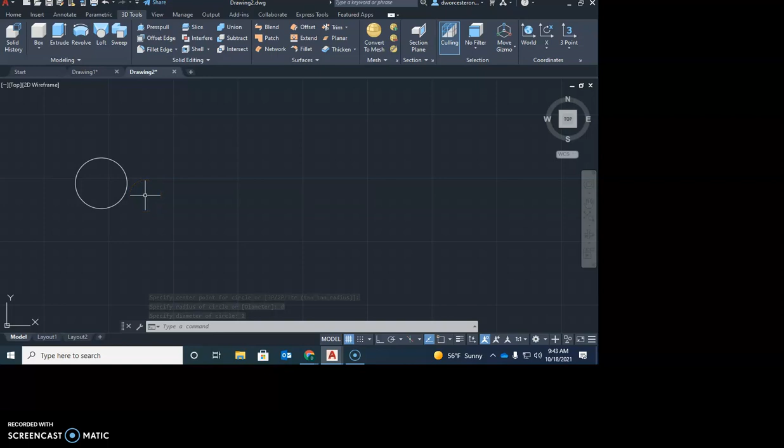Beside that circle, I'm going to use the line command and draw a set of lines that looks like a W.

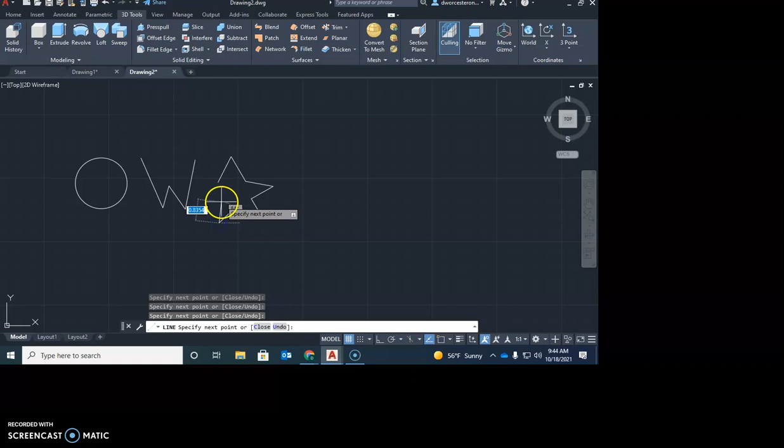Next, beside these, we're going to draw a star shape. I don't want it to be a perfect star, so don't take a lot of time on it. Try to make it approximately the same size as our W and our circle. Make sure our O-snap is on at the end so it snaps back to the beginning or end of that other line.

If like mine, yours is a little bit large - notice mine is quite a bit taller than my W and my circle - so I'm going to scale mine down a little bit.

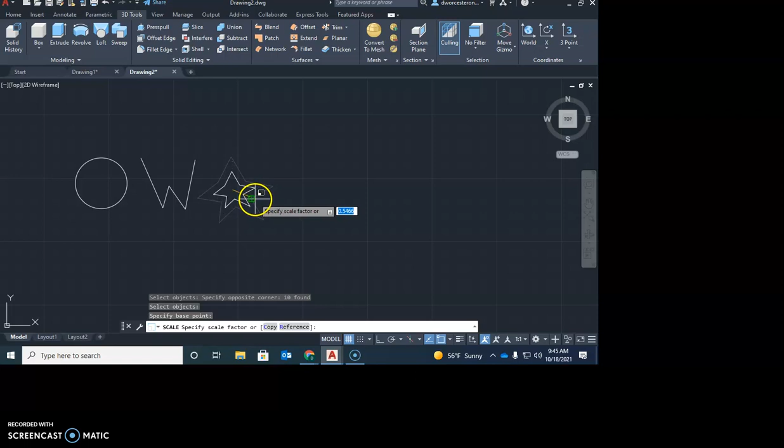I'm going to go SC for scale, select it, pick the middle of it for the base point, and pull it out here to make it a little smaller. I keep snapping to other points here - come on, work with me. About there, and then move that up into place a little bit so it's a more appropriate size.

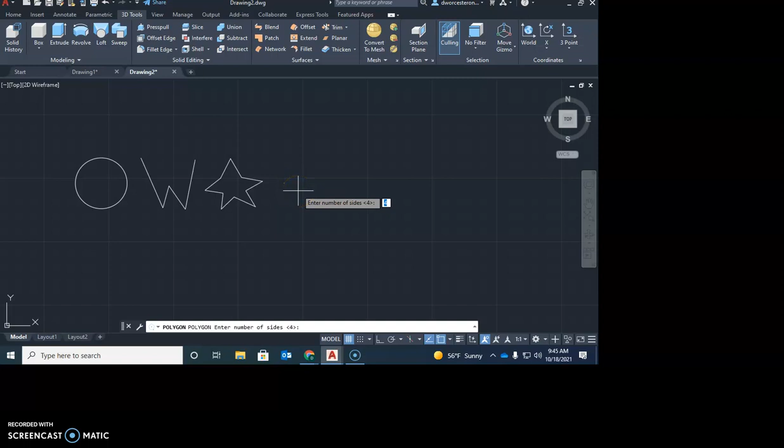Next, we're going to draw a polygon - POL for polygon. We're going to draw a 5-sided polygon, so a pentagon. I'll pick my start point; it doesn't matter whether it's inscribed or circumscribed. Again, just try to make it approximately the same size as our other objects.

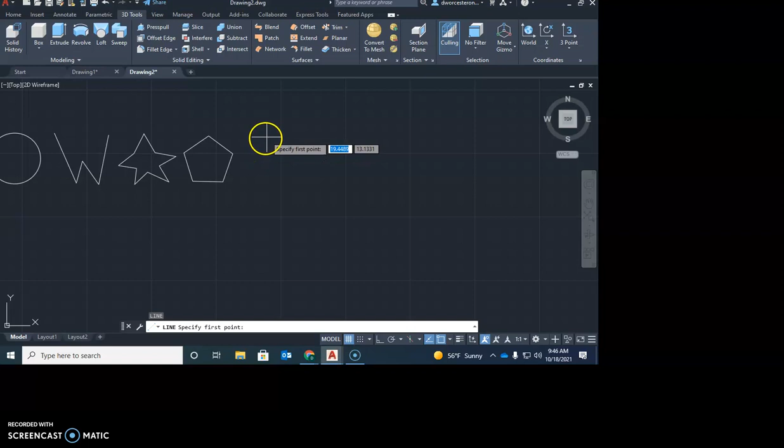Next, we're going to use the line command once again to draw a diamond-ish shape. Here's the important part on the diamond: I do not want those ends to meet, I want that to be left open. So draw the diamond shape, but leave the end of it open.

Last shape - I'm going to come down here at the bottom and draw a small circle, something like that. Then I'm going to draw a V shape, something that looks like this, from there to the center of the circle, back up to there - so a V shape.

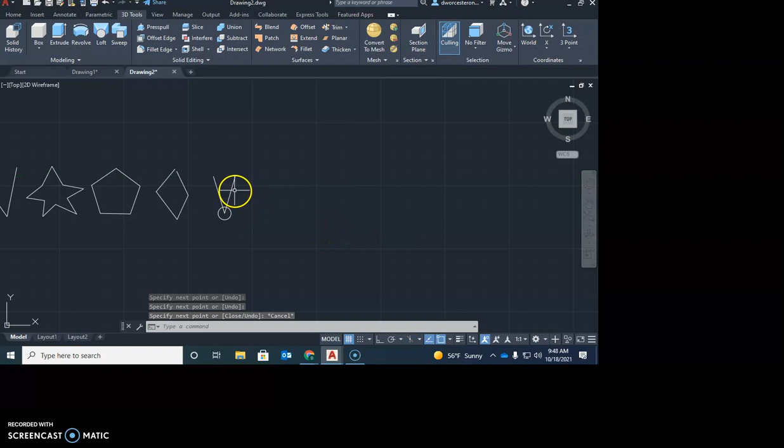Then the rocket science we're going to do on top - we're going to draw an arc from that end point over to somewhere in the middle of the arc, down to that other end point, and then trim it out. So you basically made an exclamation point.

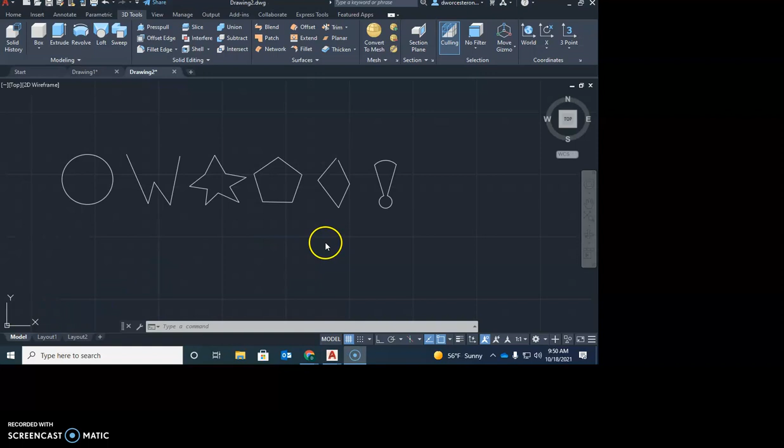Now what we're going to do is make 2 copies of this. I'm going to select all of those shapes, hit enter, make a copy straight down about there, and turn polar on so I get it straight - right about there, and right about there.

Okay, so we're going to start at the top. This is another way, or the next way of doing solids. The first way we did solids, we just used these primitive solids over here - that's all we've done so far. Now we're going to make these other shapes into solids, so let's see how we're going to do that.

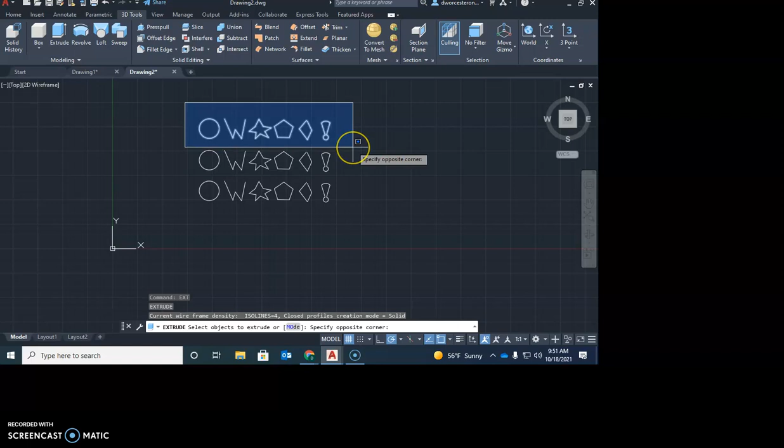Into 3-dimensional objects - we're going to use the extrude command, EXT as a shortcut for extrude. I'm going to pick the first set, all 6 of those objects, click, hit enter, and extrude those at 2.

Now let's twist those up in 3D a little bit and take a look at what we've got. All of these are 3-dimensional objects now. Let's look at the first one - we're going to hover over it. The cylinder, when you hover over it, it all highlights; it recognizes that one object.

Look at this next one, the W - it recognizes all these different parts here. The star has a bunch of different parts on it. The polygon's all one part. The diamond's a bunch of different parts. The exclamation point's all kinds of different parts. So these are a little bit different.

If I hover over the first one, notice it says 3D solid. If I hover over these parts, it says surface. Our goal here is to make 3D solids, because our 3D printer only recognizes 3D solids, and our router table only recognizes something if you create it as a solid. So everything we're striving for isn't to make a pretty picture - we're striving to do the manufacturing part of these things, and we want to be able to manufacture this. Doing wireframes doesn't do us any good.

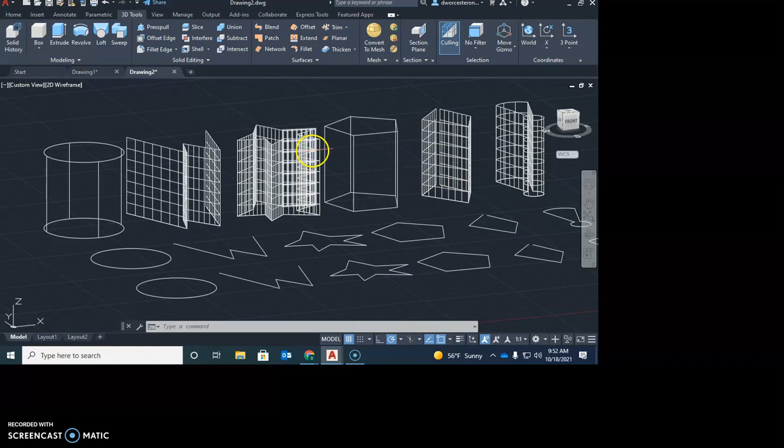So I'm going to show you how to make these things into solids, the ones that did not work. One thing I do want you to do here, though, is go ahead and change this to a conceptual view - it's a little bit easier to see them, though a little harder to tell they're not solids; you actually have to hover over top of it. But you can see things a little better. Now that it's conceptual, go ahead and change back to your top view.

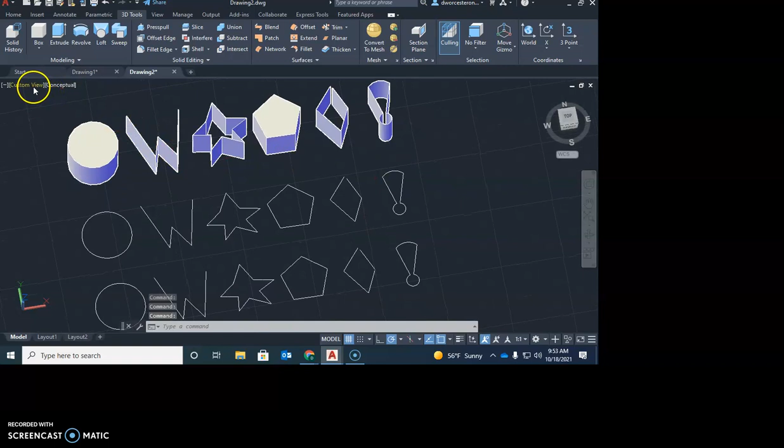And when I say change back to your top view, I'm always referencing coming over here, changing it to top, over there in that top left corner.

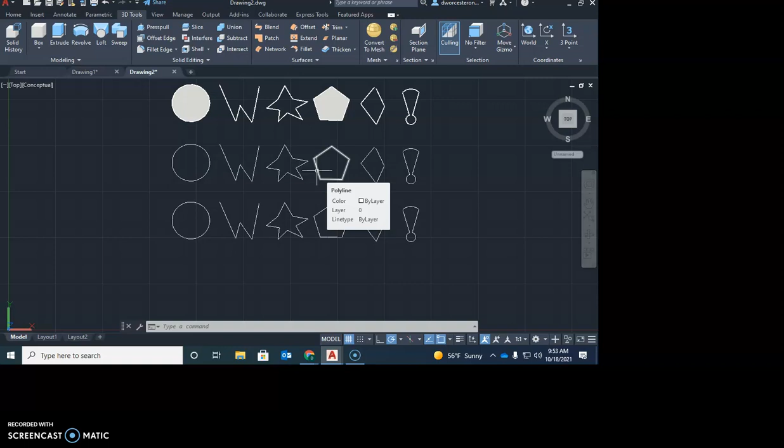Now what we're going to do is we have to do something else to this next set to try to make these into solids. We have to region them together. What region does is it takes a 2D object and tries to put it together into one object. So let's give that a shot. Shortcut for region is REG.

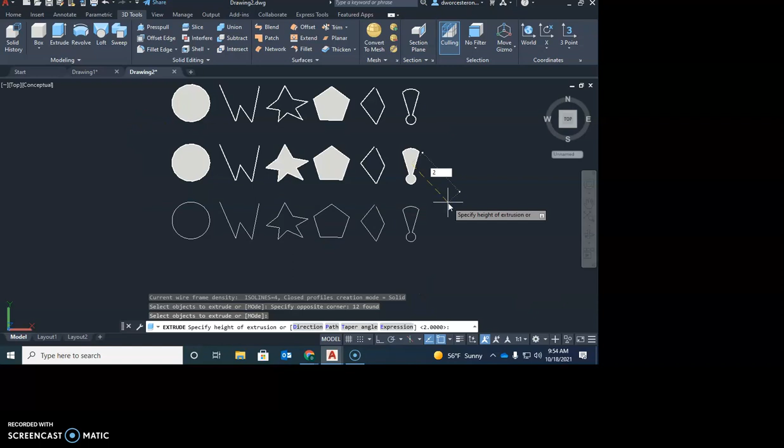Going to pick a box around this middle set and hit enter. Notice it changed some of those up a little bit. Now we're once again going to go extrude, EXT, enter. Extrude those at 2 inches, and take a look at those.

All right, so now taking a look at this next set. Notice guys, please listen. Notice the W is still those sheets, and it's still a surface. However, the star and the exclamation point are now solids, 3D solid and 3D solid. What's the difference between the exclamation point and the star, between the W and the diamond? They're closed figures. This one does not close on the end. This one's just a simple line.

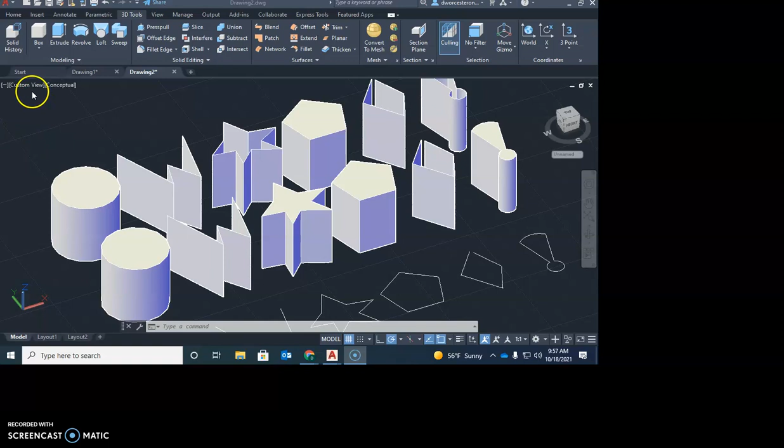So now our goal on the last set is we're going to make all these into solids, because this time we have 2 that are still not solids. So I'm going to go back to my top view. Again, it's right over here, named view to top.

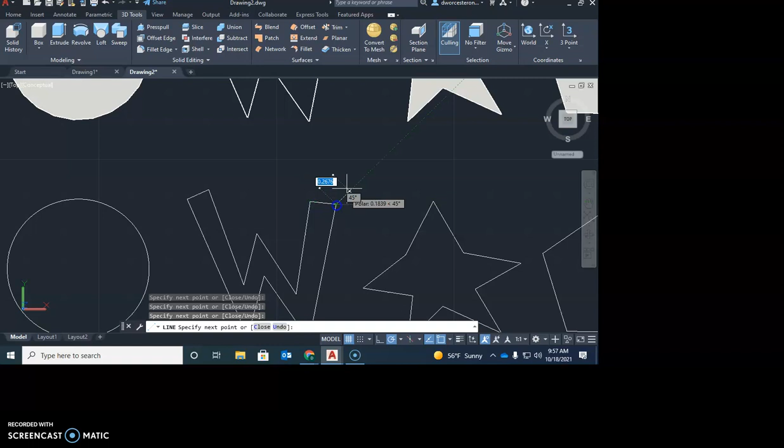The diamond is pretty easy. You're just going to grab one of the grips, pull it up there to that end point. Now that diamond is closed. For the W, a little bit harder. All I'm going to do is add a thickness to the letter W. I'm going to come in here, come over, something about like this, and add that thickness to the W. So closed off the diamond, added the thickness to the W.

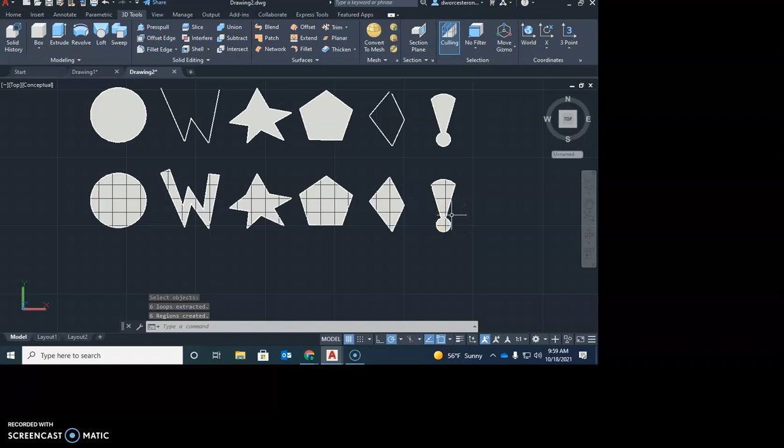Okay, now that you have those all closed off, you're going to go ahead and use region, REG for region. Select all the objects, hit enter. Here you can even tell in this previous step, it changed all these and shaded them. They're not extruded yet, but it turned these into planes, little 2D planes now. So now all we need to do is extrude those same objects at 2. And now when you look at them, all these objects, those are now a 3D solid.

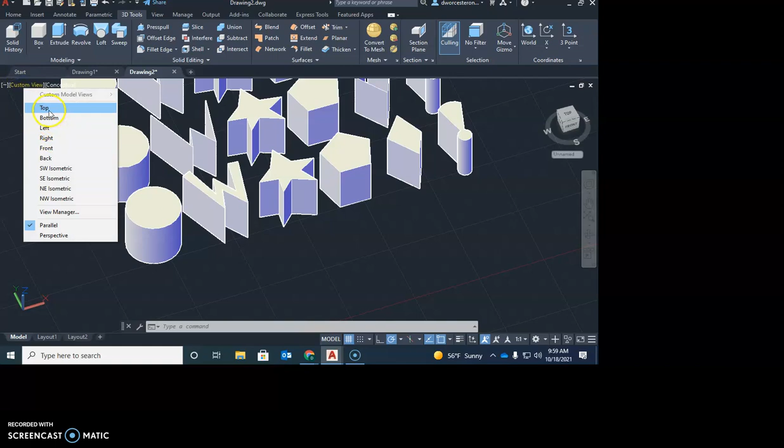So all I'm really trying to show you here is this very simple little exercise, but it gets back to that part of your 2D drawings. You have to know how to make a good quality 2D drawing and make something that will be a closed figure.

If you do a drawing like this and you have a line, and say I put that line back over top of that line, and back there, and back here, whoops, not like that one, like so, and make this object, the likelihood of this working as a region is not going to be there, because these lines are partial lines that go back and forth on top of each other. They have made AutoCAD better, that it will recognize these lines are on top of each other a little bit better. Let's double check and see. Region, cross our fingers, and it did region that.

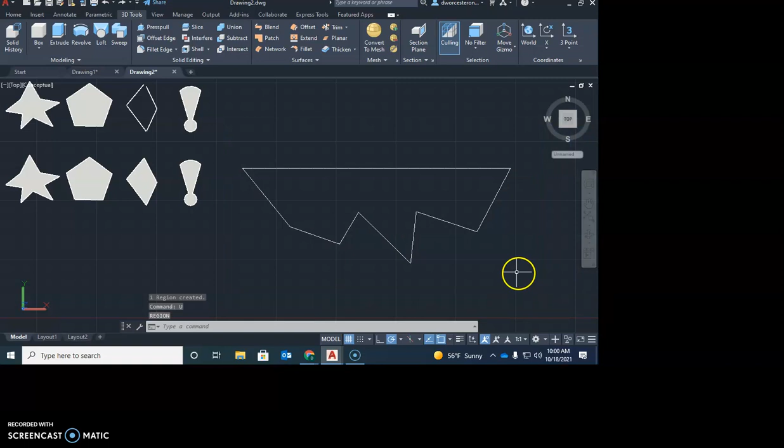I'm kind of surprised. But one thing it definitely will not do, if I zoom way in here and do that, oh, that looks like a great object. Go here to region, it's not going to region that.

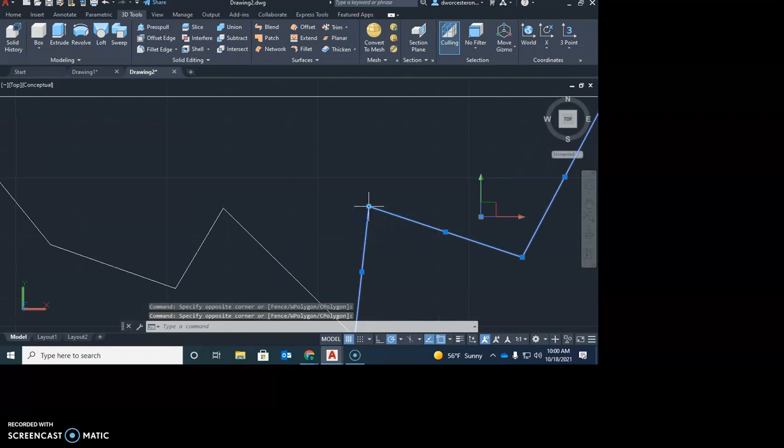And sometimes when you call me over, oh, Mr. Wister, this region isn't working. I can sit there for 10 minutes and try to find this little teeny tiny spot where they don't connect. And it's really a lot of times more work than what it is just to redraw it correctly. Because trying to find that one spot, I knew where this one was, but trying to find that over the entire drawing that you have is sometimes impossible. So do try to be careful. Do try to make your drawings correctly, and it'll save yourself a lot of headache.

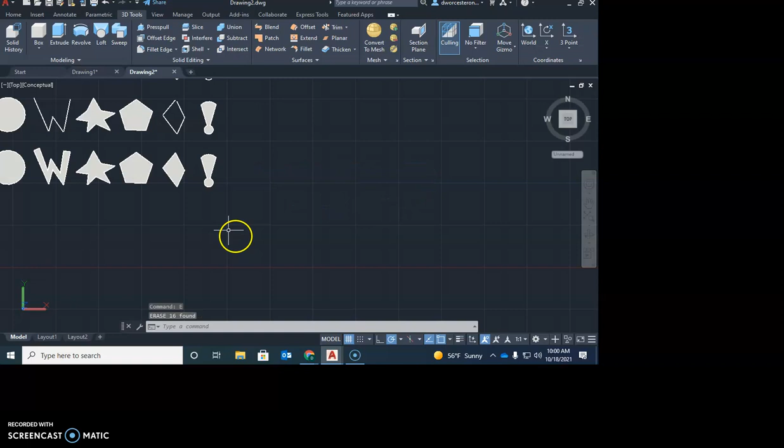All right, now to submit this, what you're going to do is put it in an isometric view. So you're going to click on one of the corners of your cube. And when you do this, I want it to be in a normal isometric view, and I'll show you what I mean by that. This is looking at the back side of the object.

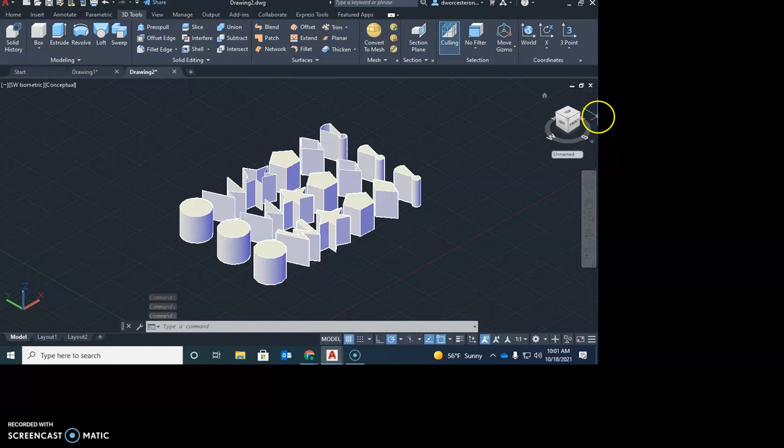It's kind of upside down from the order we did it, so I don't like that. I don't like this one either, it's upside down from what we did. However, I do like this one, I don't mind it at all. Like so, or like so. So get it into one of those two views, here or here, and zoom in on that nice and tight, and submit that. And there you go.